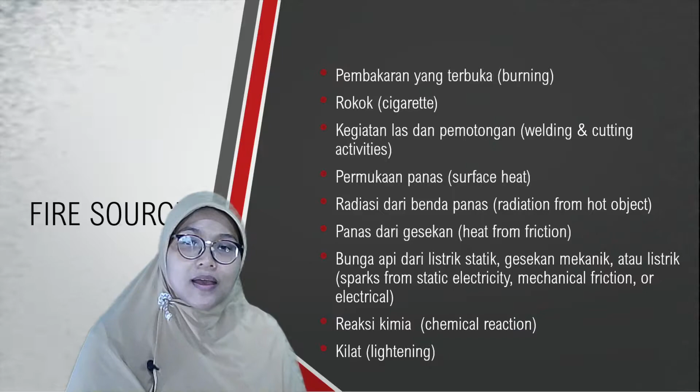Jadi pembakaran yang terbuka, rokok begitu ya, ini yang paling banyak kalau di perusahaan, karena banyak pekerja yang merokok. Kalau tidak disediakan smoking room khusus ini sangat berbahaya, karena kalau mereka merokok di tempat kerja, muncullah segitiga api: ada fuelnya, ada heatnya, ada oksigennya, maka muncullah api.

Liquid can also produce fire. We can classify liquid into whether they are flammable or combustible. The flammable liquid, if the flash point temperature is lower than 37.8 degrees Celsius, then it's considered flammable.

The one that has a flashing point of more than 37.8 Celsius or 100 degrees Fahrenheit is classified as combustible. There is also classification within that: for flammable, we can have 1A, 1B, and 1C depending on the flashing point temperature. While for combustible, it's divided into class 2, class 3A, and 3B.

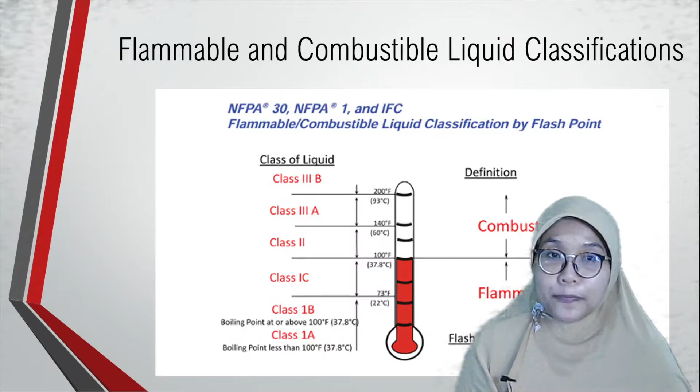Jadi untuk flammable, apabila flash point-nya di suhu ruangan itu bisa muncul bunga api sekitar 37.8 derajat, maka kita klasifikasikan sebagai flammable. Untuk yang lebih tinggi, kita klasifikasikan sebagai combustible. Masing-masing ada klasifikasi yang lebih detail.

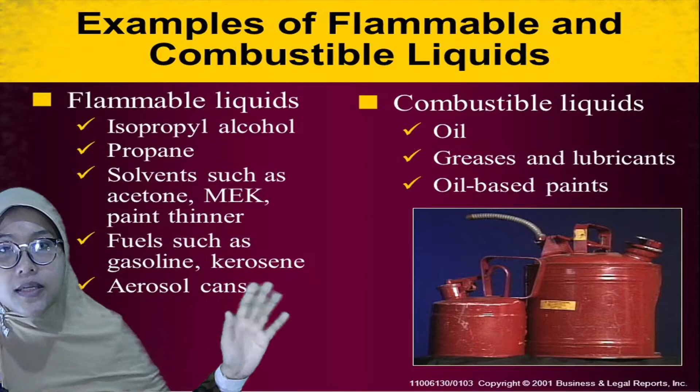Contoh dari flammable itu adalah isopropyl alcohol, propane, solvent, fuels such as gasoline, kerosene. While combustible is oil, grease and lubricant, oil-based paint - it is considered as combustible liquid.

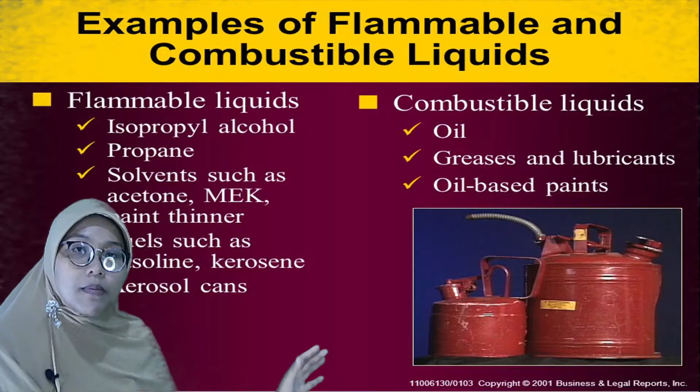How to prevent fire? One, you need to have a list of all possible sources of ignition and fire hazard. Jadi kita harus buat daftar semua kemungkinan bahan-bahan yang ada di gudang atau di shop floor yang bisa menghasilkan api, mudah terbakar.

Second, storage flammable and explosive materials correctly. Jadi kita harus menyimpan bahan-bahan yang mudah terbakar dengan benar, posisinya benar, tempat penyimpanannya baik, sealnya bagus.

Kemudian installing fire extinguisher system such as sprayers and fire poison. Jadi memasang sistem pengaman kebakaran yang baik. Mungkin apinya akan muncul, tapi bagaimana kita bisa menekan persebaran apinya agar tidak membesar.

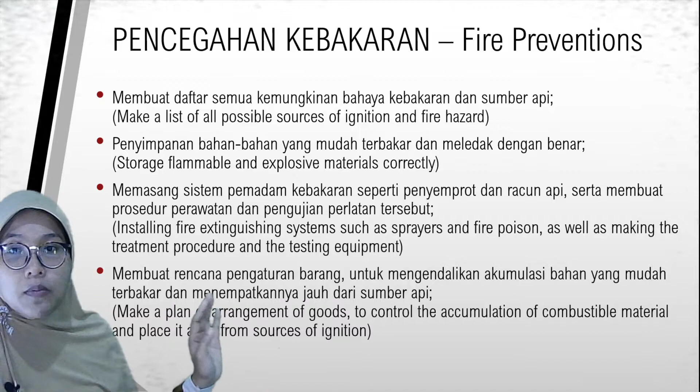Make a plan of arrangement of goods to control the accumulation of combustible materials. Jadi membuat rencana pengaturan barang untuk mengendalikan akumulasi bahan yang mudah terbakar. Sebisa mungkin kita klasifikasikan, tapi jumlahnya jangan terlalu besar berkumpul di satu tempat, karena kalau satu meledak, ledakannya akan jauh lebih besar.

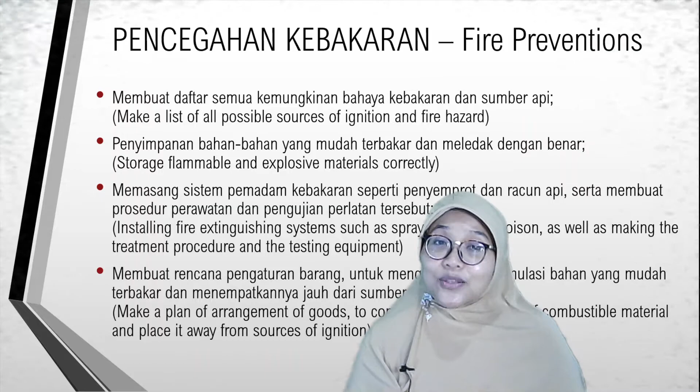Jadi kita tetap harus mengontrol, kembali lagi ke material data sheet, kita harus lihat potensi bahayanya. Kalau sama-sama berbahaya didekatkan satu dengan yang lain, tingkat bahayanya menjadi double.

Make an evacuation plan, make a route of the building and organize the workplace to accommodate it. Jadi kita juga harus membuat rencana evakuasi, bagaimana menandai dan membuat jalur rute keluar yang paling aman buat pekerja.

Training the workers, kita juga perlu melakukan pelatihan kepada pekerja in case ada emergency. Kemudian memberi tugas dan tanggung jawab, giving a person a job to setting the room, to coordinate and also make the fire prevention evacuation and do regular checking on it. Jadi harus dicek secara berkala.

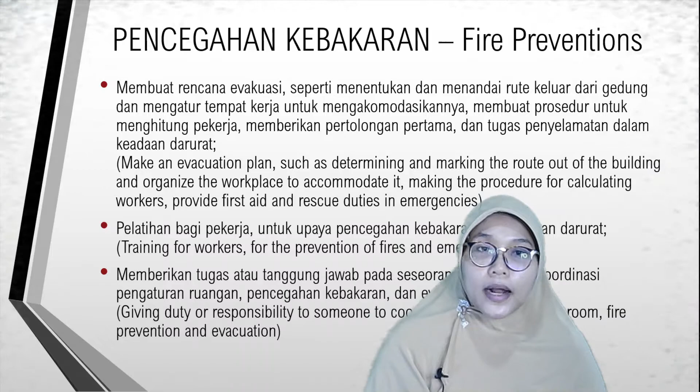Fire poisons, racun api, we call it fire poisons. There are several classifications based on water, dry powder, foam, carbon dioxide, and wet chemicals. Each of them has a specific usage.

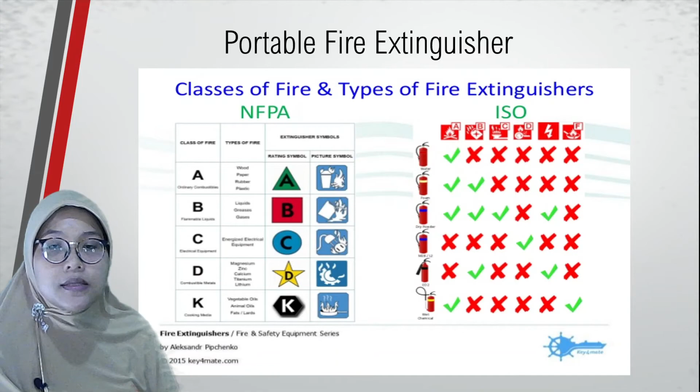Jadi nggak semuanya fungsinya sama. For example, water is used for wood, paper, and so on. Dry powder is for different materials. This is a more detailed classification of these fire poisons or fire extinguishers.

How to use fire extinguishers? There's an abbreviation, PASS: pull, aim, squeeze, and sweep. Pull the pin, aim the nozzle at the base of the fire, squeeze the handle, and sweep the nozzle side to side. Jadi dibuka pinnya, kemudian diarahkan nozzle-nya ke arah api, kemudian squeeze handle-nya, kemudian nozzle-nya digoyang-goyang dari sisi ke sisi, nggak cuma diam.

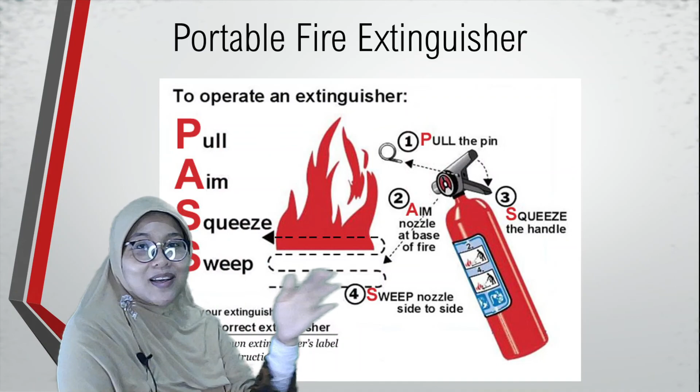Okay, I'll continue with the electrical hazard phase.